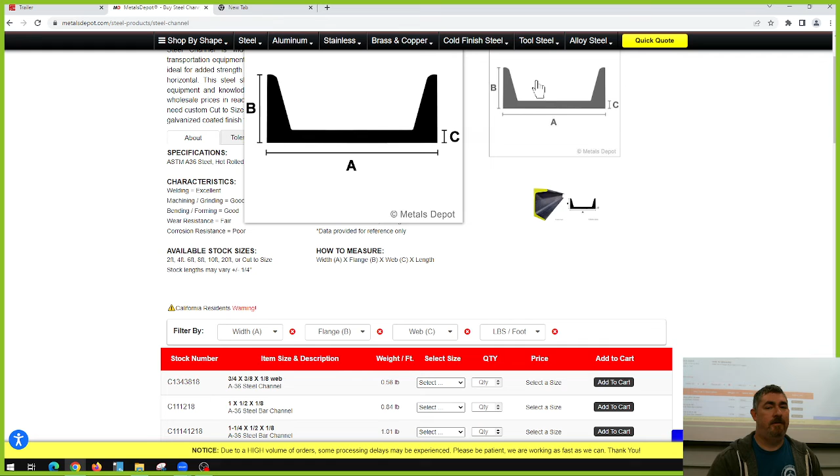The angles here for the inside of the channels don't really matter, and what that fillet is doesn't really matter. Just make it look good. We want to try and make it look close.

How could we verify that it's exactly the right shape? I haven't shown you guys this yet. We're in Fusion. Let's get it started up. So when we're in Fusion, we can tell it a material.

By default, it's already using steel as a material. But we can just do a 1 foot section and see what it weighs, right? And if it matches up, then we know that our profile's right. If it doesn't match, we can just adjust the profile until we get it looking right.

Start it up. Come back here. The channel we have is 3 inches by 1.5 inches. I just went out and measured it.

So what kind of channel is that going to start with? Yeah, it's going to be a C2, 3, something, right? And they just go down that list and find one that's 3 by 1.5.

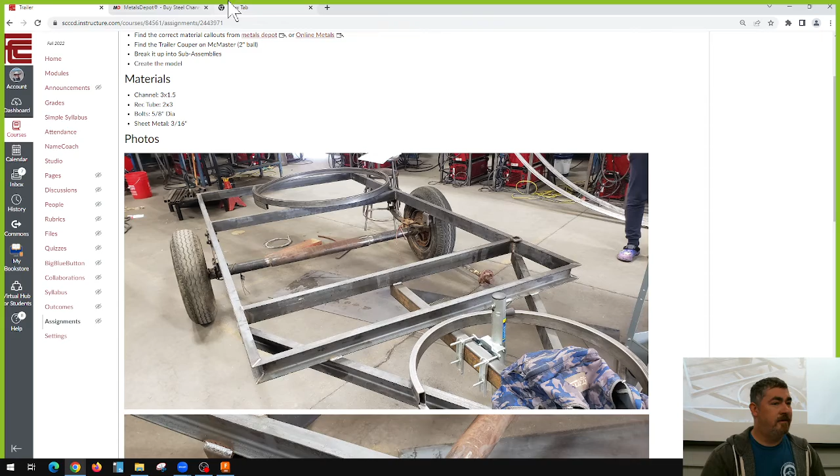Size, I think. So if you look down, C1s only go to 2 inches, and after 2 inches it jumps to C2, and then that's all they have here.

If we go to Online Metals, let's see if they've got different sizes there. Steel.

Channel. If we go to shape,

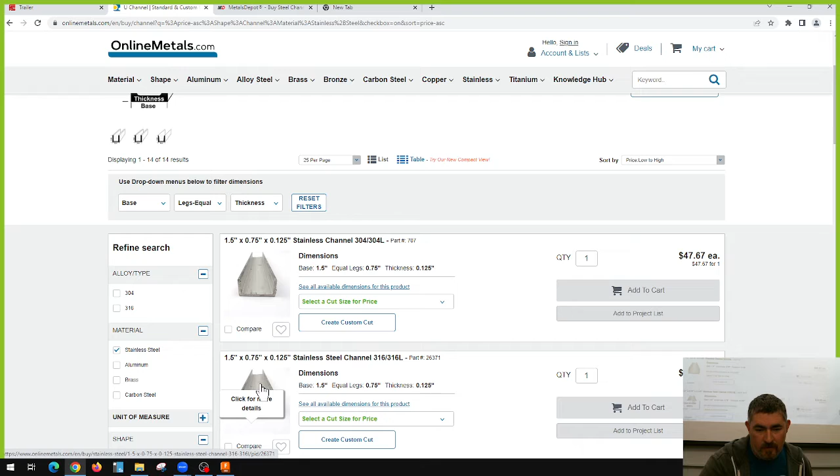I don't even have just carbon steel. These are this, and so you can see they're a little bit different shape. They don't sell just regular steel channel here.

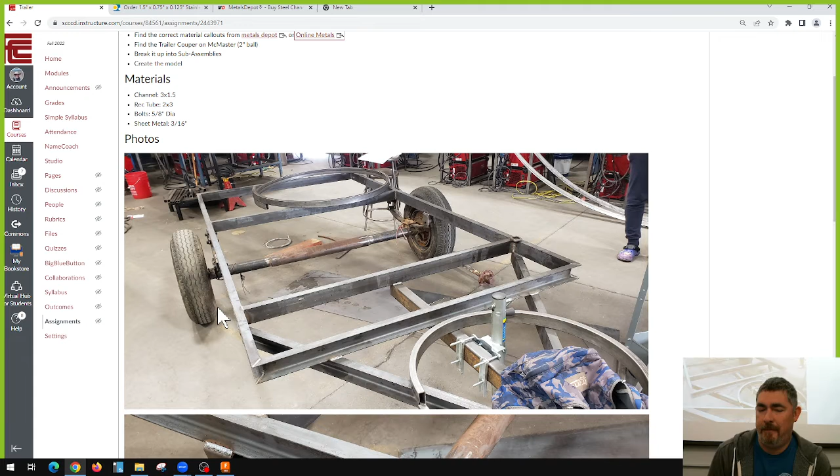That's good to know. So we know that we wouldn't go here to get that. So these sizes are a structural steel type of shape. So they have like I-beams and stuff like that also in this classification.

So what other information do we need to know here? I've told you we need to find the callout from there. We need to go and find the trailer coupler.

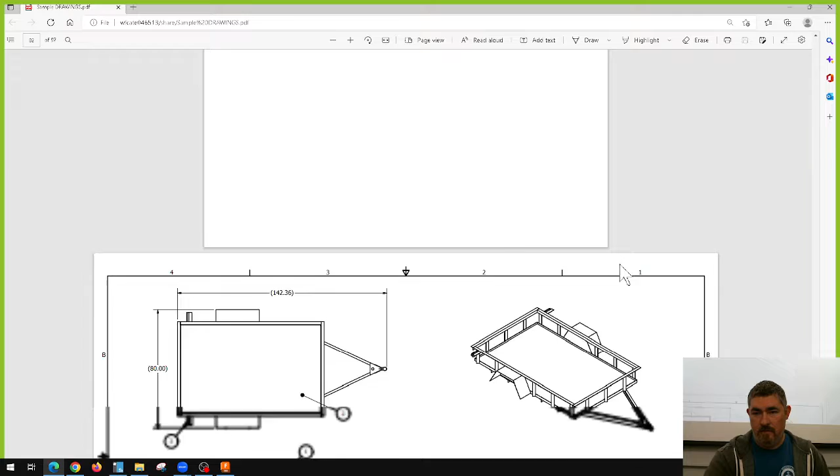So I should get a picture of it, but the thing on the front that connects to the hitch. So look at my sample drawings. Trailer coupler there. This part in the front.

So you need to find this coupler, and that'll help you determine what angle this is. I'm not telling you what angle it needs to be, because you might find the same one or you might find a different one. And you guys can work together on this, okay?

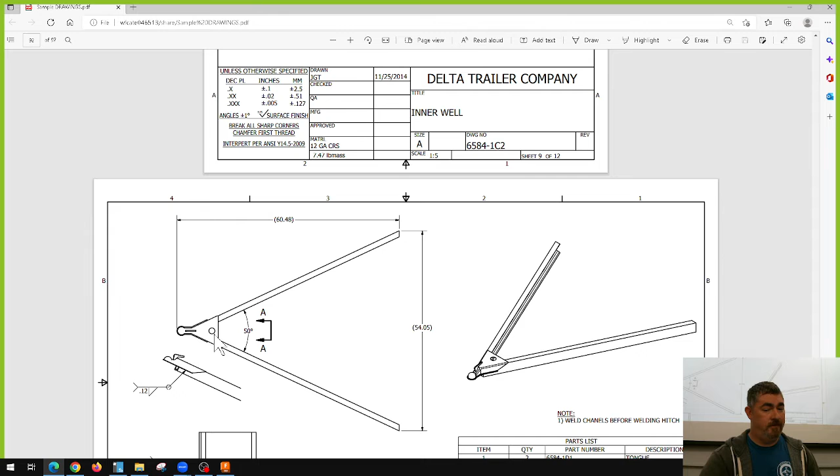But kind of finding the coupler is going to, you want these arms to go out at the same angle as it. Those are going to go back. You can see it's going to come back until it hits here, and wherever that hits, so we probably want it

to be about how far do you think? If this is 3 inches, how far do you think that is? But we're going to kind of estimate a lot of stuff on this, because what's the main benefit of CAD?

We can change it, right? So as long as we draw it where we know that if we change it, it's going to behave correctly, we can just get rough numbers in now, and then we can fine tune it to make it perfect, right? So if you have to design something off of a drawing, just worry about getting it in, making it as good as you can, because the spacing of this, guess what? We can change that easily, right? We just slide a dimension.

So I don't know, what do you guys say? How far do you think that is? So this is 5 feet across. That's 10 feet that way.

How far do you think that is? Maybe 1.5 feet or so, or 2 feet. I don't know, does it matter?

So from that point, we'll put a channel across, and that's where we're gonna start. You can see the tongue starts right in front of that, then it goes from there, gets cut flush with that and comes up. The tube starts flush with the back of that channel.

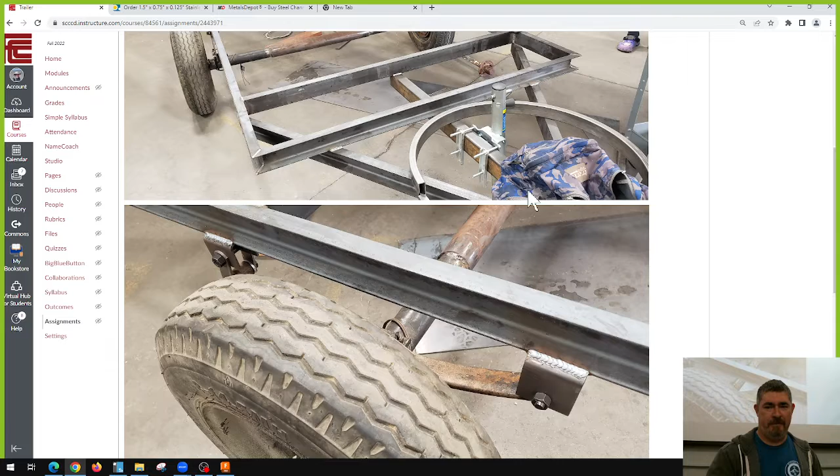And there's another one here, back, kind of halfway between those two, ish. The spacing for these is about 3 feet, kind of in the middle, or the back middle, just past the back midpoint.

Again, they can all adjust, but kind of set it up so that they can.

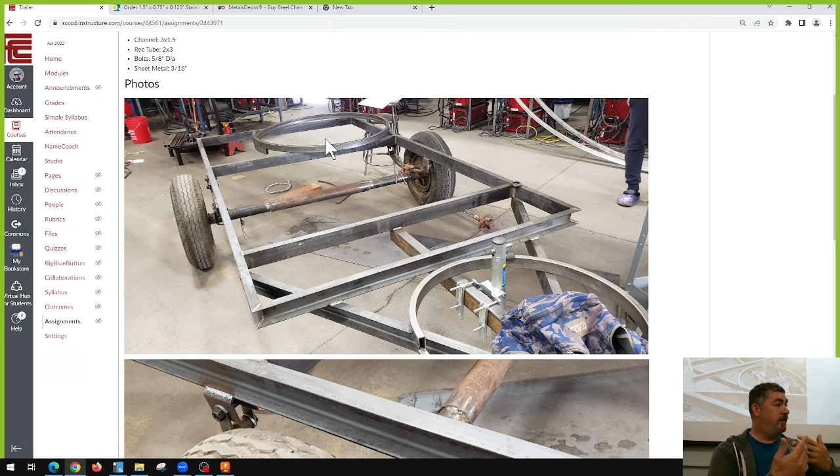I also want you to break it down to subassemblies. What do you think are some good subassemblies for this?

At least what I think is the first step, maybe the tongue by itself. But we also maybe want to weld everything else and then put the tongue on it. So if we know the angle, we should be able to do the tongue by itself, right?

Do the tongue here, get those welded, and then maybe this frame here as another one, depending on how we want to do it. Or maybe do this frame first, then turn it upside down, lay these out, put them in place so we know that they're lined up flush, and then weld it.

I don't know, but even though they probably have some flex on them anyway, because they're nice long pieces, you probably adjust it. So either way, it's probably working.

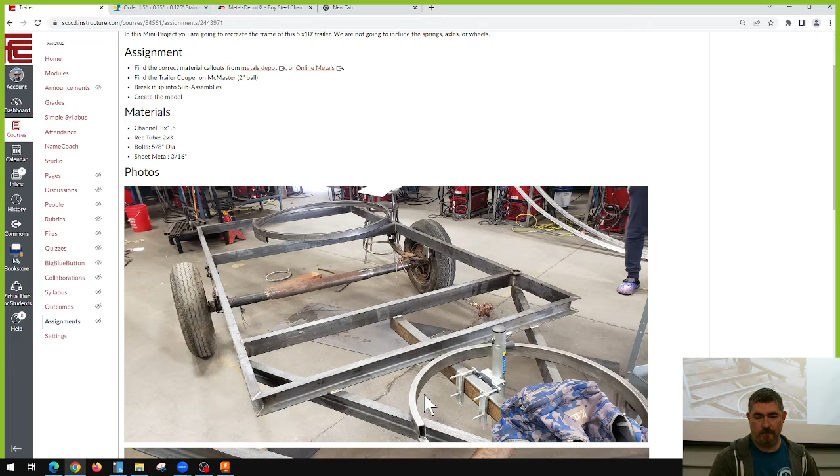And then create the models. I did also say here that the bolts for right here are 5/8 diameter.

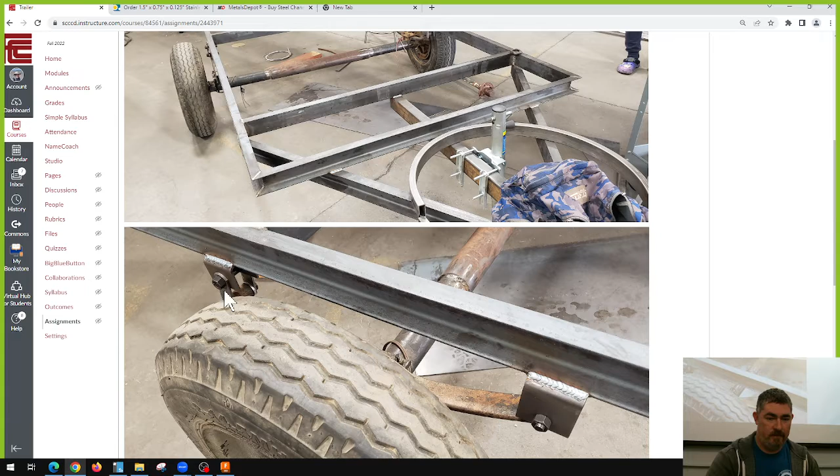One has just the tab coming straight down, or this little U with a bolt and a nut through it. This one in the back, it comes down, and then it has these other pieces, this little kind of tab here to allow it to swing forward and back.

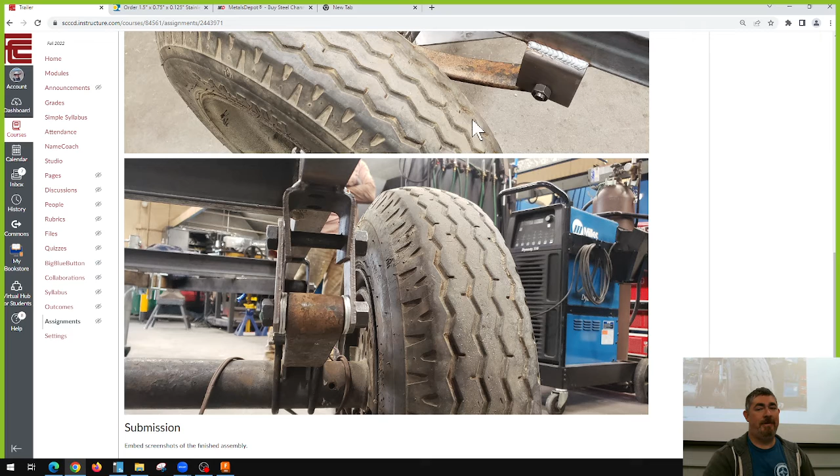And I would make this a little bit narrower, so I'd probably go to the inside of this. What happened here is they just made these two the same size, and they're like, oh, it's too wide, and they bent it in.

That happens a lot when you don't do the drawings ahead of time. So we want to make this where it actually does come down straight, okay?

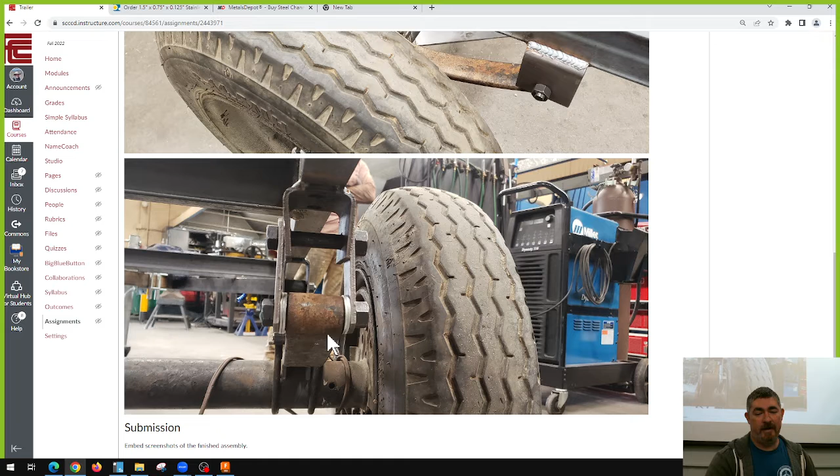And I'm going to leave the width of it up to you guys, because again, it can adjust, okay? You can see that it's wider than the tongue, and here it looks like it probably needs to be, this width here is the same as that, maybe a little bit more.

So if this is 1.5, that's maybe 1 3/4. So maybe we want the inside measurement of this one to be 2, and this one to be a little bit less, so that way it can kind of line up the outside of this with the outside of that.

Okay, does that make sense? Any questions?

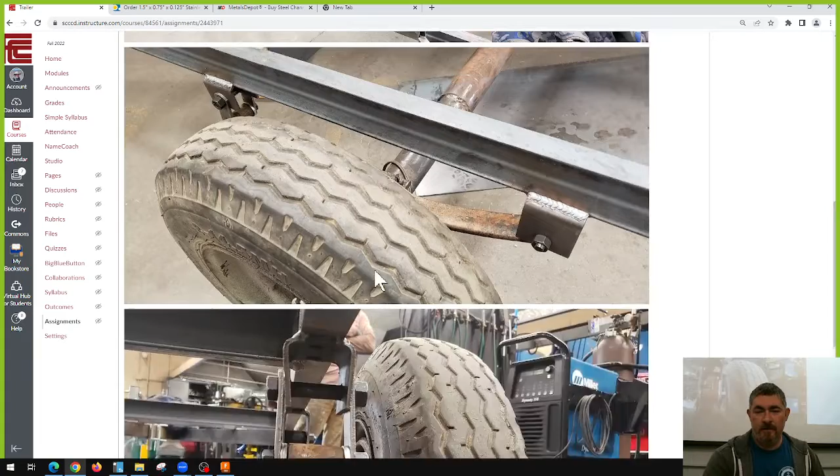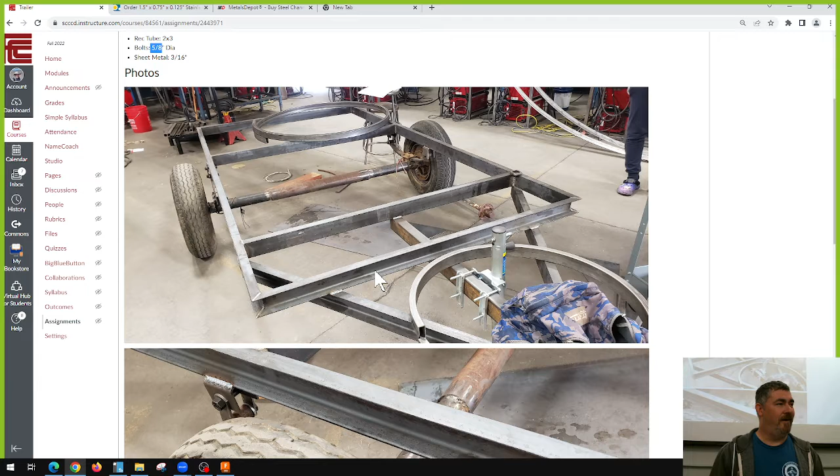This is kind of something you might get in the real world. They bring you one, like, I rolled this together myself, and I want 5 more. And like, oh, okay.